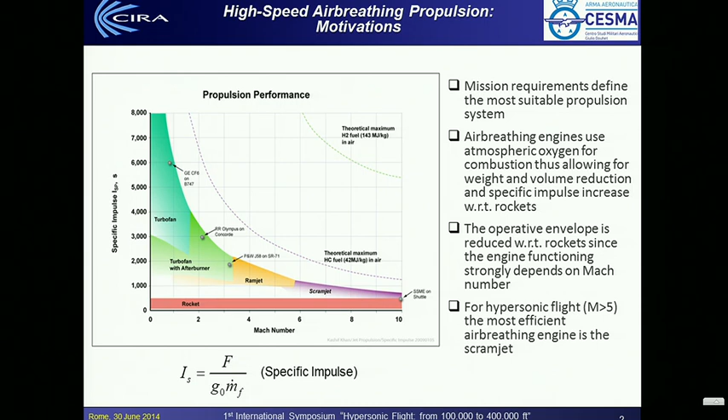Advantage and disadvantage of this kind of system, and the applicability. Applicability of the system is for civil transportation. We had a long study within Europe regarding the transportation system using the scramjet engine. I will describe this just now.

But of course, for a weapon system, if we want to reduce the time to target, we have to increase the speed, and the only way to increase the speed is to use a more efficient engine. And again, ramjet and scramjet.

And of course, if we want to have a launcher with higher efficiency - a reusable launcher - we can think of a two-stage-to-orbit system, and the first stage of a two-stage-to-orbit system will fly at Mach 7 or Mach 8, and again we need a different propulsion system: ramjet or scramjet.

Hypotheses to work with this kind of propulsion system are essentially two. One is the strong integration between the airframe and the engine itself. For all hypersonic systems flying with scramjet, the bottom part of the vehicle is the engine: the first part is the inlet, the central core is the combustion chamber, and the rear is the propulsion nozzle. But it's all the bottom part of the vehicle, and this is why I marked that airframe-engine integration is one of the main hypotheses to develop this kind of system.

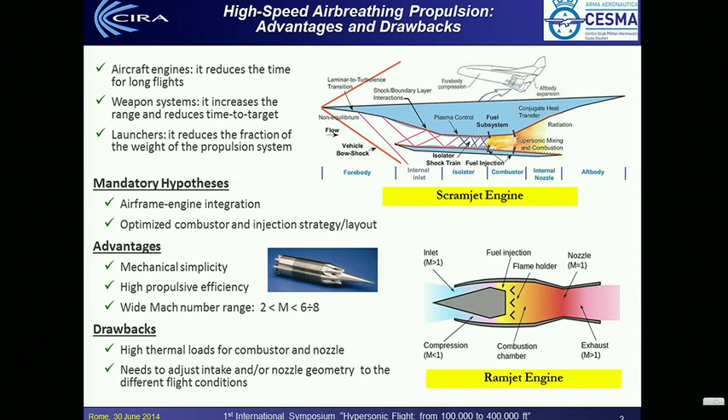CIRA has of course, for many years, been working on this topic. The interests are the standard interests of CIRA: to create Italian competency and a collaborative approach to reach the goal I described just now, and of course to represent the connection between Italian interest and the European and international community working on this.

And we developed a number of activities, moving from design of the propulsion system itself, to deriving the aero database for hypersonic propelled vehicles. Again, I have to stress that propulsion systems are very strongly connected in hypersonic vehicles - the propulsion system and the shape of the vehicle are one thing. And then we are working on flight experiments.

Already mentioned the HEXAFLY-INT project, started from previous activity we developed for civil transportation, and then some ideas on the future possibility to apply this kind of system to tactical missiles. Also the ITEM project, using MHD technology, which Lionel Marraffa just introduced - there will be another presentation from Bologna University on this. It's possible to apply this technology to propulsion systems to reduce heat loads and stabilize the flame, and I will show you one slide on this.

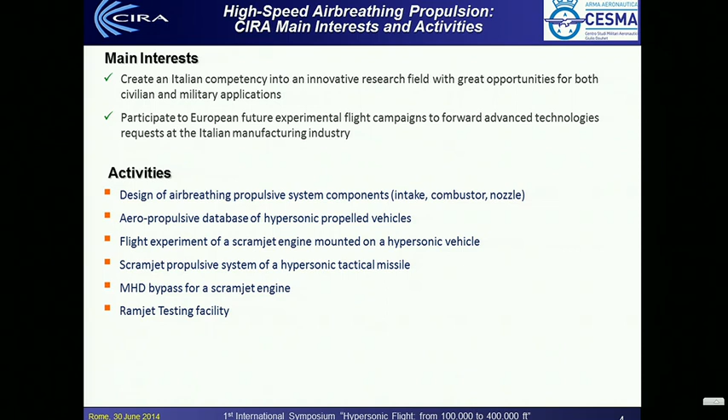A third and last idea is how to have testing capability. We are working to develop a rocket facility at CIRA, but it's possible to change the application of this kind of facility to also test ramjet engines.

Which kind of application can we think of for hypersonic flight? We can think of long-range civil transportation within Europe, financed by framework programs. Along the last 10 years, all of Europe worked on different solutions.

The one on top left is the first concept, based on an idea from REL, a British company that worked on a civil transportation system based on a ramjet engine. On top right, an evolution of the idea for long-range civil transportation based on the ESA-ESTEC concept. This is based on a scramjet engine, but also the HEXAFLY is a sort of evolution of the first two - the evolution of the LAPCAT program into HEXAFLY, where the whole world worked together to achieve an experience of flight.

I want to answer a question that was asked 5 minutes ago: does Europe have the capability to develop this kind of vehicle? The answer is, technically, yes. Economically, I have some doubts, and this is the reason why we should put together around the table a number of continents, not only Europe, in order to achieve a hypersonic flight. But we are working on this kind of application.

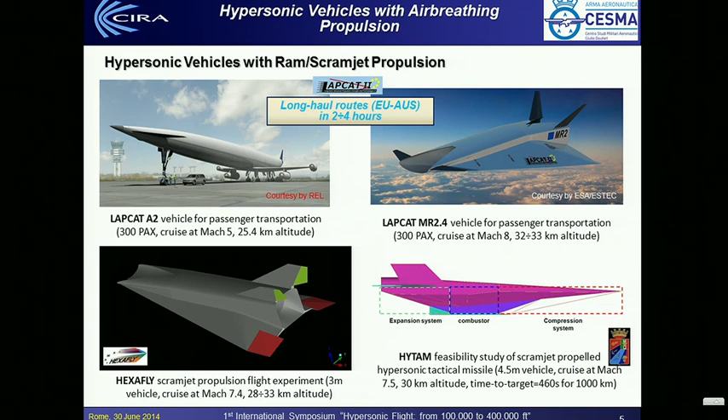And the last is the possibility to have a tactical missile with dual use based on a scramjet engine. I will move very quickly to show you the possibility of this engine.

This is the English solution by REL. This is a very complex engine because it should accelerate the vehicle from the runway, from the airport, so we need an engine that also puts the vehicle in the right condition to start a scramjet. Another drawback of a ramjet or scramjet is that they cannot start from the airport, but only from supersonic flight, so we need a system to accelerate the vehicle to supersonic flight.

This is one of the possible solutions. It's a very complex engine where we put together three different concepts: a turbojet that is able to accelerate the vehicle from the start, and ramjet in order to assure the cruise of the ramjet vehicle, and the rocket in order to have more power if needed.

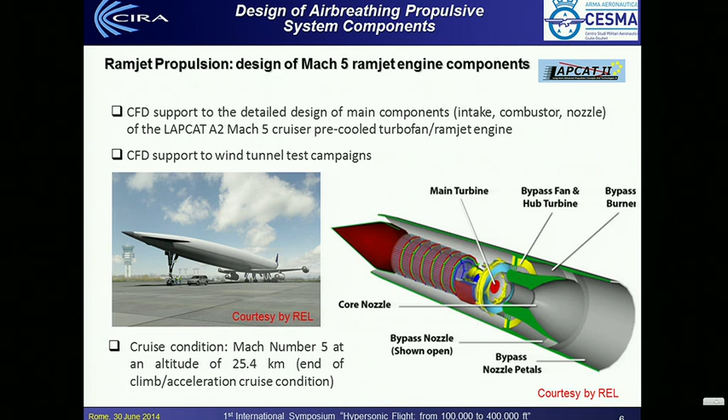A lot of work was done within Europe for this kind of concept. You can understand the complexity of the burner, the combustor chamber, that should stabilize the flame - even for a ramjet engine, the flame works at Mach 0.7; Mach 0.5 is a critical condition, but not a supersonic one. Even so, we should deeply work to refine the concept of the engine in order to assure flame stabilization.

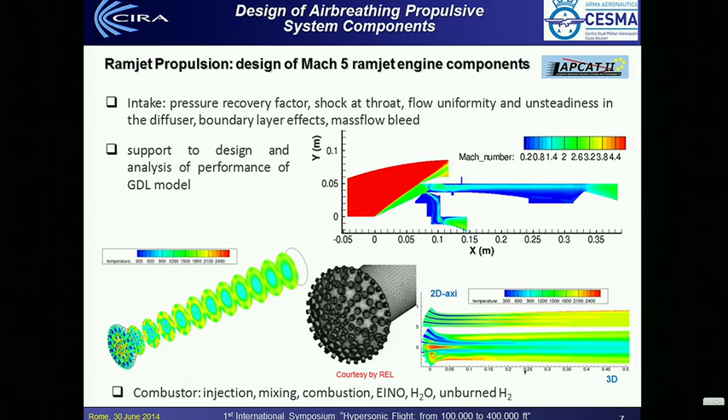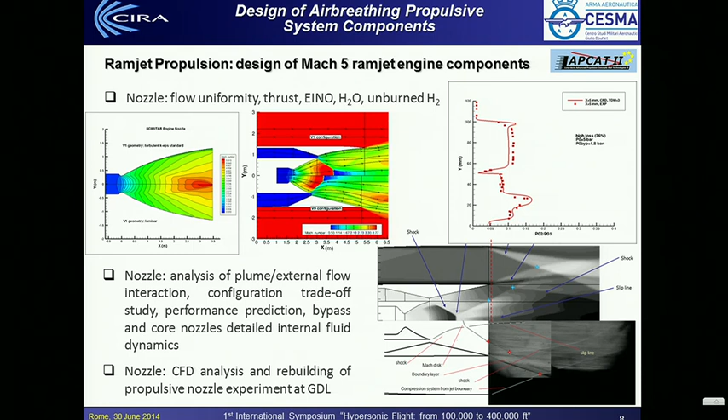I will skip this, even if it's in very good shape, in order to understand if the predictive means, the CFD codes, are able to match experiments. And you can see that the technology we have at this moment can assure this.

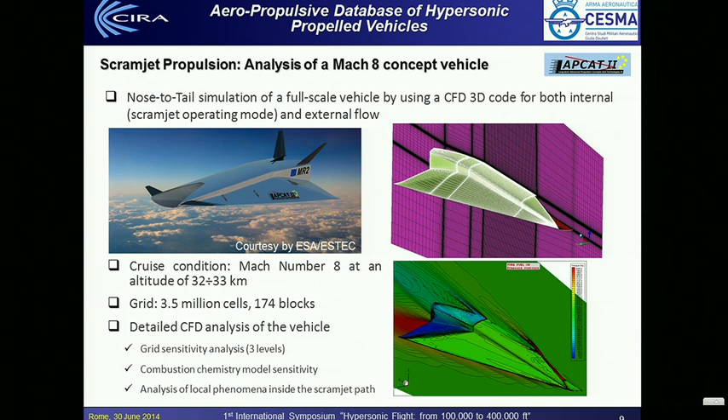Quickly moving to the scramjet engine, this is the evolution of the previous vehicle, fully based on a scramjet engine. Again, for this kind of engine, we should assure the positive balance between the drag of the vehicle and the thrust provided by the engine.

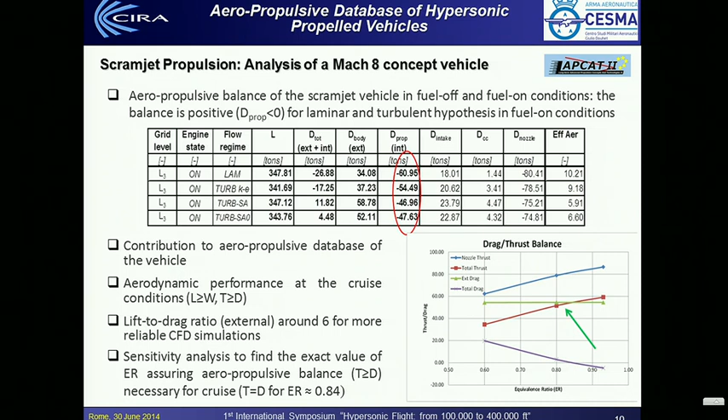You can see that if you work deeply, you can assure the utilizability, the availability of this kind of propulsion system, and the possibility to trim with a positive net balance thrust to drag condition. Again, you can see that the engine itself is very critical.

You need to stabilize the flame, and in this case I want to point out that the simulation means should be well tuned, because the simplification from 3D to 2D geometry does not provide a good solution. The 2D solution is very different from 3D, just to stress the need for very careful calculation in order to understand the capability of this kind of engine.

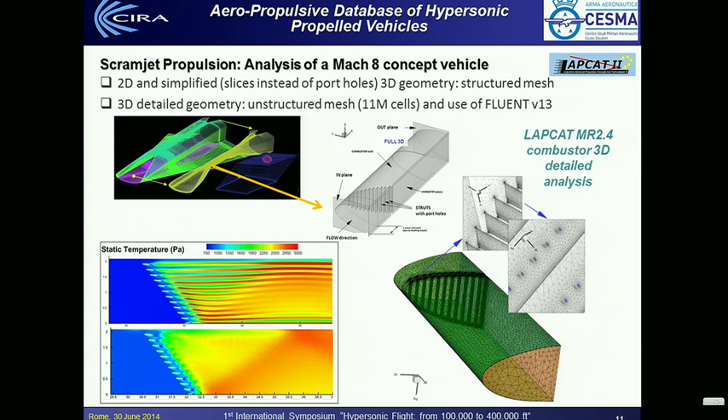I will move on. These are examples of the same engine and some wind tunnel tests for this kind of engine, done in Germany at DLR.

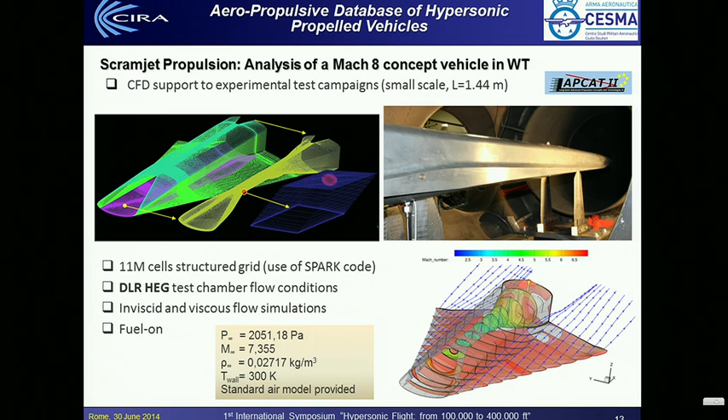I want to move to the flight experiment. That is, for now, a wish for us. We are working to have this kind of mission. We will use a rocket in order to put the experimental vehicle in the testing condition, because we have to accelerate to hypersonic Mach number.

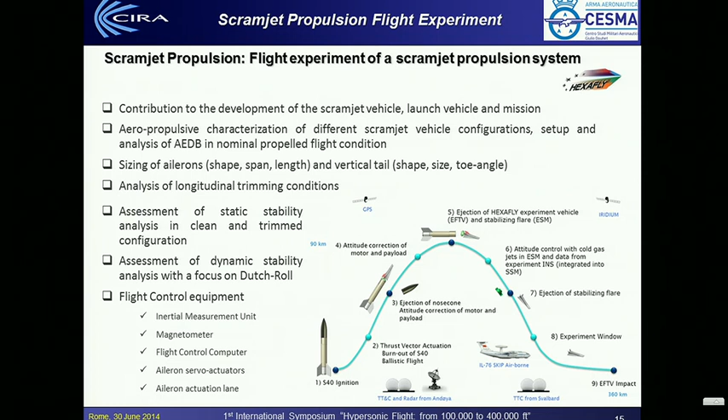The way to accelerate to a hypersonic Mach number is by means of a sounding rocket, that will deploy the vehicle at a certain altitude and flight condition. At that point we can start our investigation, aerodynamic and propulsion, during the re-entry maneuver. But this is not a re-entry from space, simply an energetic re-entry in order to reach the needed flight condition.

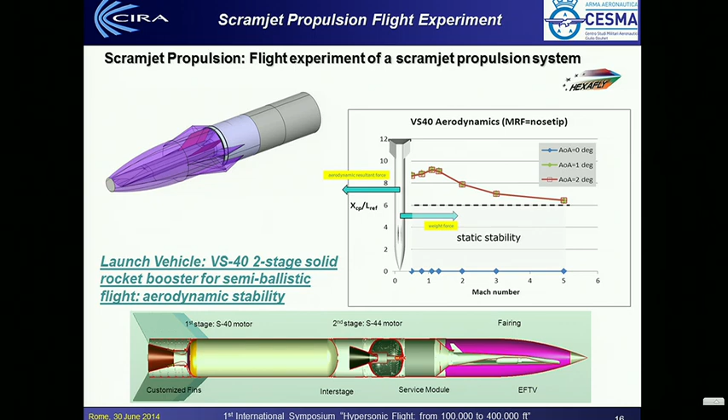Again, an example of the layout of the vehicle. You can see that the experimental vehicle, only 4 meters long, is a payload for the sounding rocket, able to inject the vehicle into flight.

I will skip this slide.

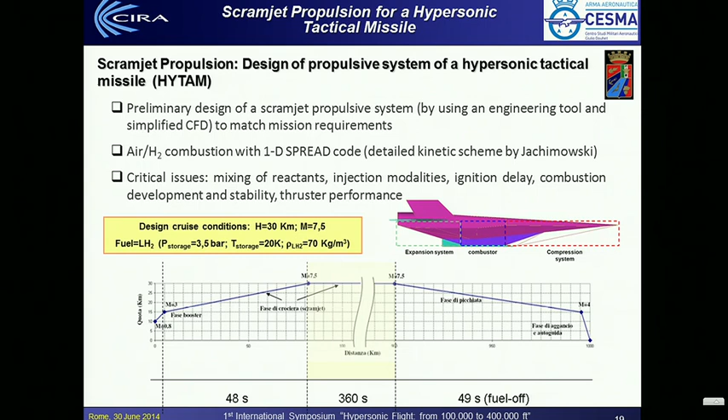Just one word about tactical missiles. If we want to reduce the time to target, we need to fly at very high Mach number. If you want to fly at very high Mach number with reduced weight of the engine, we need a different propulsion system. The only propulsive system is ramjet or scramjet. This study shows that this solution can be applied to tactical missiles.

Just one word about MHD, as promised. We can apply this kind of technology to reduce the speed at the inlet and accelerate before the nozzle. If you apply this technology, you can take the energy from the inlet and put the energy into the nozzle, and so take the energy to decelerate the flow at the intake.

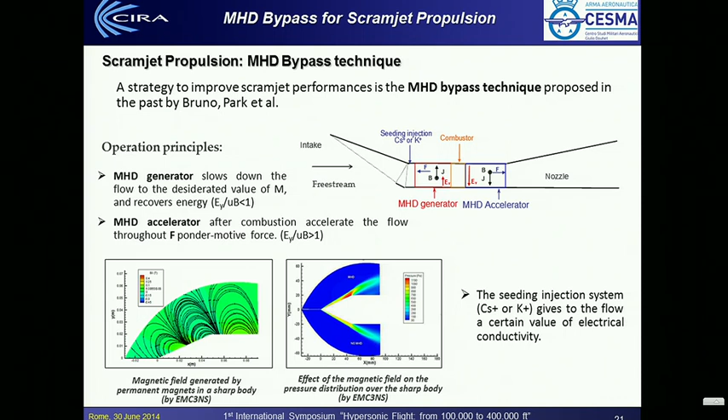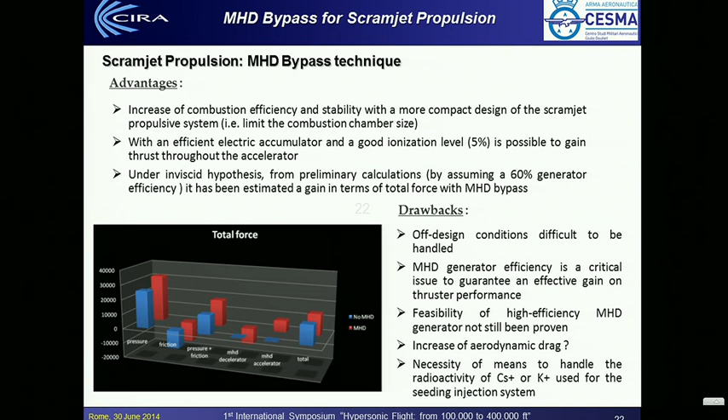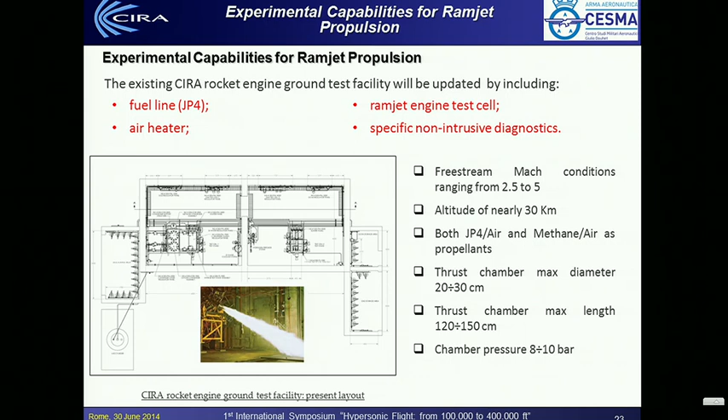It's possible to test interesting ramjet engines with different combustion systems, methane or JP4, with a sufficiently long thrust chamber, 20-30 centimeters, and up to one meter and a half for the entire chamber. For ramjet, these are good numbers. For scramjet, not sufficient.

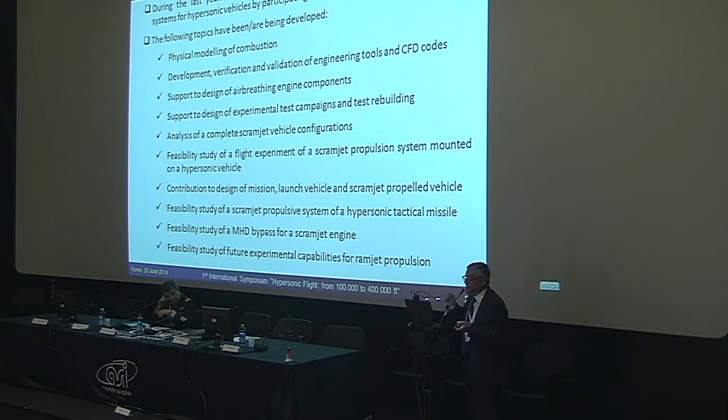Conclusions. CIRA has been working for 10 years on this kind of solution, and we have moved towards a number of topics, even though we have no experimental capability. But working together with all our friends in Europe, we were able to develop physical modeling of problematic combustion.

We were able to verify the capability of design systems like CFD, support new testing, support the project of the vehicle, support wind tunnel experiments. The technology we actually have in our hands can bring us into a position to contribute to future missions, contribute to studies for dual-use applications, and understand the future of this kind of propulsion system.